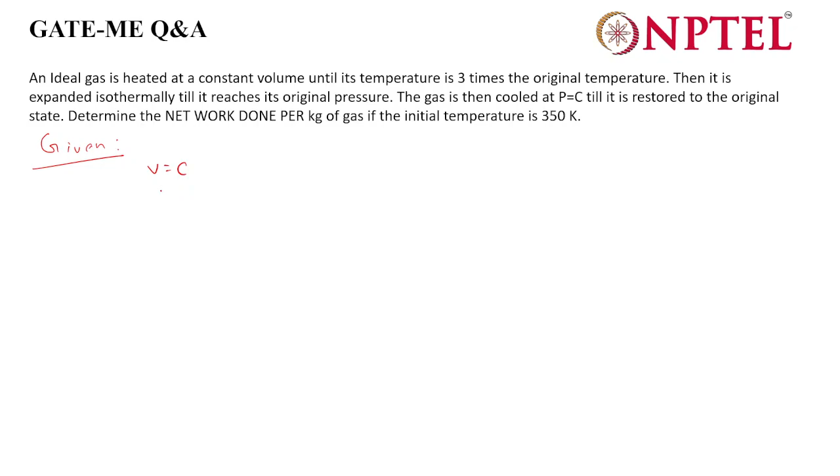So here we will write the constant process - they have mentioned an ideal gas heated at a constant volume. So volume is constant, they have told, and its temperature is 3 times of the original temperature. So when we try to make the PV diagram.

Temperature is 3 times of original temperature. So what can anyone tell - what happens when volume is constant and temperature is heated? Hello. The pressure will increase. Pressure will increase, and pressure will increase - how will it increase?

It will be directly proportional to temperature. P directly proportional to temperature for the constant volume process. Okay, constant volume process.

At a constant volume until temperature is 3 times of the original temperature - if we take this process, this is point 1 and this is point 2. So this is P1 and P2, and we know P2 is 3 times of P1 now, right?

Hello. Yes sir, yes sir, sir yes sir.

So now they told that it is expanded isothermally till it reaches the original pressure. So when it will expand, then the pressure will drop, right?

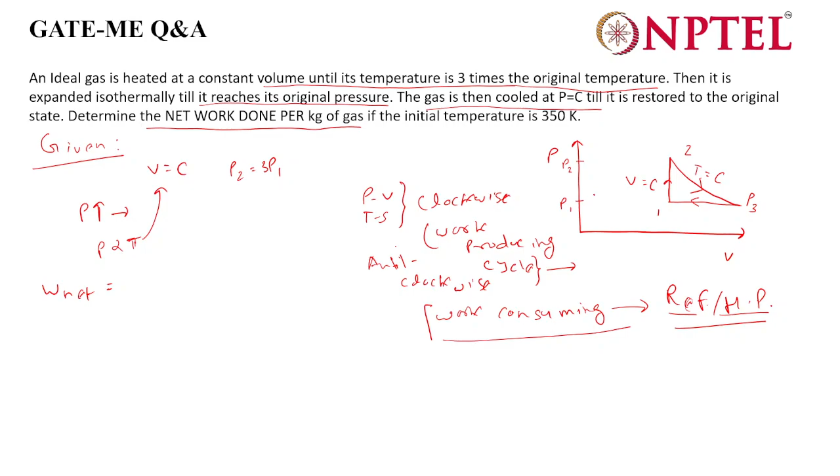So now coming to this, we have to find the net work done per kg of gas. So what would be the net work done? Work done from each process in the cycle, right? Hello. Yes, sir. So how many processes are here? Three processes are there, right?

Correct. First process is work from 1 to 2. Second process work is W 2 to 3, and 3 to 1. We will find the work from each process and add. Okay. So process 1, step by step we will go.

So for the constant volume process, what is the net work done? Zero, sir. Hello. Zero. Is anyone asking anything?

Okay. So process from 2 to 3. Which process is that? Isothermal, right? So here, what data are we having? Here they have given initial temperature is 350 K. Apart from this, they haven't given anything, right? Hello. Yes, sir. So the first point temperature is 350 K.

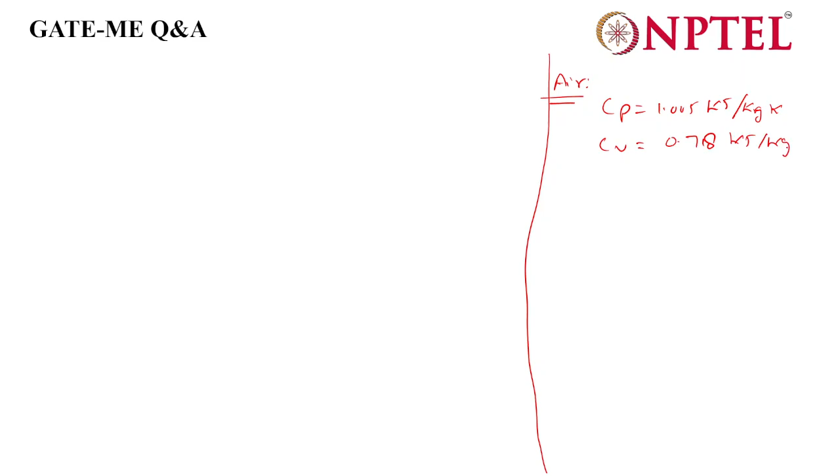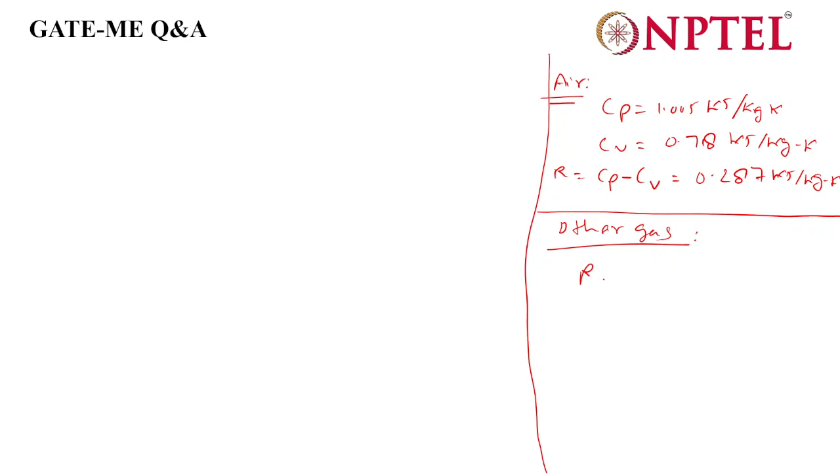For air, Cp is 1.005 kilojoule per kg Kelvin, and Cv is 0.718 kilojoule per kg Kelvin, and R is Cp minus Cv, so 0.287. And for any other gas apart from this, R would be R bar by M.

Only mic is on, sir. You can mute; if you are asking anything, then you can unmute. Okay. Sir, someone's mic is on.

From your side, try to unmute.

Okay. So if any other gases we have to find, then R is 8.314 divided by molar mass, in kilojoule per kg Kelvin. And here Cv would be R by gamma minus 1. R we will be finding from here, and gamma for that gas you would be knowing. So Cv you will find from here, and Cp would be gamma R by gamma minus 1. So these formulas you have to keep in mind. Actually I have derived all these, but for the initial part you were not there.

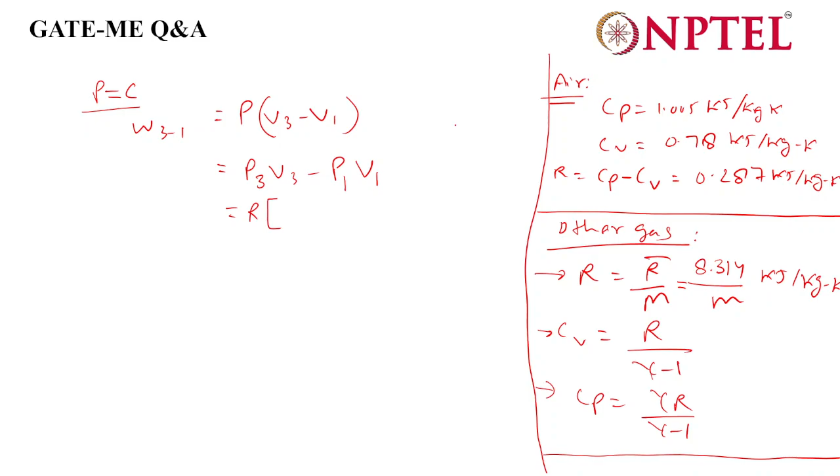That is the constant pressure process. So for the constant pressure process, what is the work done formula? Pressure into V3 minus V1, right? So here P3 V3 minus P1 V1, but we don't know the value of pressure and volume. So from the ideal gas equation we can write it as R T3, and P3 and P1 are the same, right? Yes, sir. So R into T3 minus T1.

Do we know the value of T3 and T1? What is T3? Yes, sir, we know, 1050. Here T3 is 1050 and T1 is 350. I think here we are going from 3 to 1, na? So the opposite of that would happen, na? 3 to 1 we are going, right? Getting what I am saying? Yes, sir.

So actually the process is like this. Here we are going from 3 to 1. So final minus initial we have to write. The final point is 1 and initial is 3. Here P1 V1 minus P3 V3. So according to the ideal gas equation, we will write it as R into T1 minus T3. So R would be 0.287. T1 is how much? 350. And this one is 1050. So what is this value?

Hello. Have anyone calculated this value? Doing, sir. Minus 200. Sir, minus 200.9 kilojoules per kg. So for all three processes now we have done the work. So net work done would be how much? 331.06 minus 200.9. So net work done, how much? 130.16 kilojoule. So here this is the simple question for the net work done.

So now moving to the next question. If anyone has not done it, you can see. Should I wait or try the next question? Take some time. Sir, it's completed. Please proceed to the next one. Okay, I'm waiting for 1 minute. Sir, show the previous slide. No, sir, next question, please. Don't worry. Share the PPT of the previous class, sir.

Sir, please explain how we have taken V3 by V2 in process 2 to 3, the work done in process 2 to 3. One minute. Please explain the formula again. You are saying, in process 2 to 3, how we have taken P2 V2 ln V3 by V2, right? Yes, sir. Sir, one more time explain from the start.

Yes. So here I am explaining again from the start. Three processes are there. They have given the initial temperature for point 1. Process 1 is from point 1, a constant volume process, and the temperature is increased. If volume is constant, then pressure keeps rising, directly proportional to temperature. So from 1 to 2 the temperature rises from 350 to 1050, right?

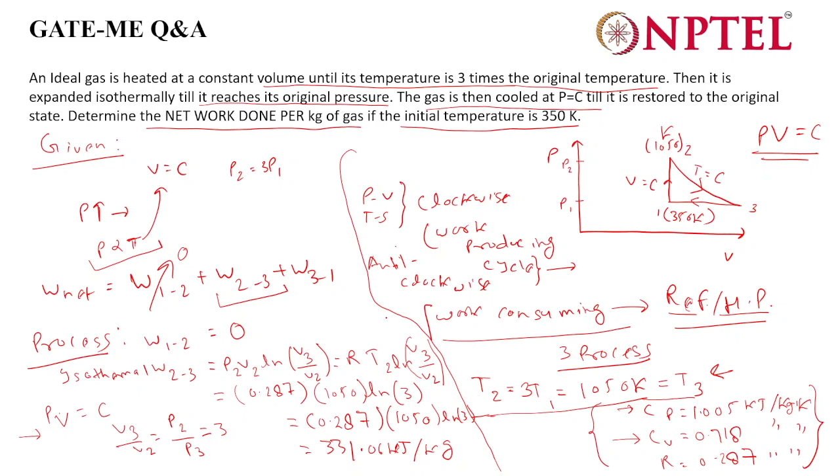Next one is the constant temperature process, the isothermal process. So for the isothermal...

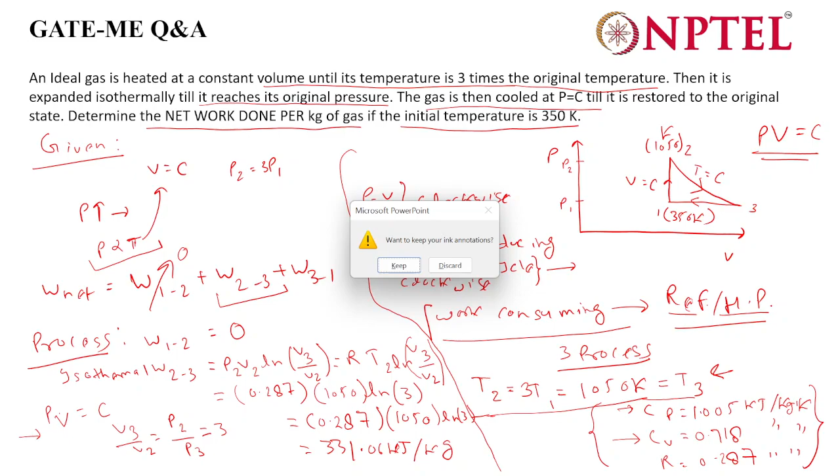Sir, I have one doubt in the previous question. Sir, according to the second law, we cannot do net work without rejecting heat. So in this cycle there is no rejection.

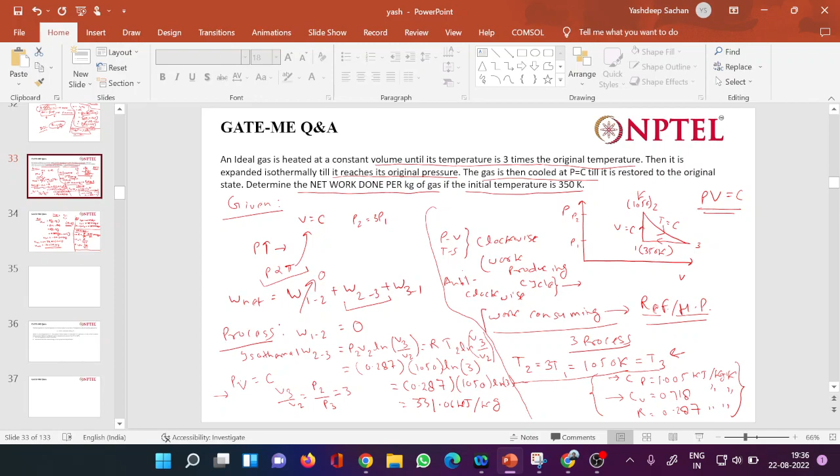Not calculation, is this cycle possible? Don't worry. The cycle is there, so it is possible. You are saying heat transfer is not there. Heat transfer is there, but you haven't calculated it. That is what I said. Okay, sir. So read this question.

I am also reading along with you, so it will not take much time. The heat capacity at constant pressure of a certain system is a function of temperature. So for the ideal gas, what are we considering?

Cp is a constant we are taking, right? With the temperature we are saying it will not change, but generally it will change with the temperature. We used to take it as a function of temperature, and in the thermodynamic property relations we will see that Cp and Cv will be changing with the pressure also. So for the ideal gas it will be a function of temperature only.

So that's what they have said here: at constant pressure, Cp is a function of temperature only and may be expressed as this expression they have given. So it is the specific heat capacity or the heat capacity. Can anyone tell what is the difference between the specific heat capacity and heat capacity? Sir, specific heat capacity is per unit kg.

So is it specific heat capacity or heat capacity? Heat capacity, sir, written initially in the question. So don't worry about the mass; there is no mention of mass. It includes mass. So when temperature is in degree Celsius, we have to take it.

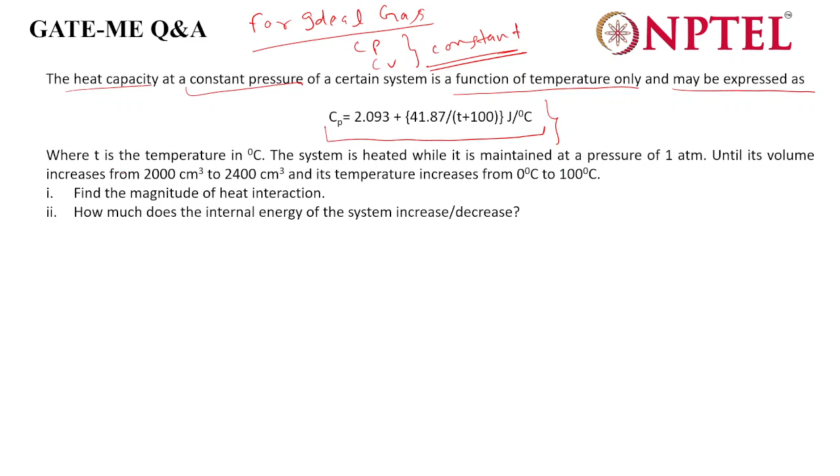So the system is heated while it is maintained at a pressure of 1 atm. So pressure is constant here, and the value they have given is 1 atm, right? Until its volume increased from 2000 centimeter cube to 2400 centimeter cube. So V1 they have given 2000 and V2 they have given 2400, and the temperature has increased from 0 degree Celsius to 100 degree Celsius.

So what we have to calculate in the first question? Sir, you have to calculate the heat interaction. What is the heat? Can anyone tell? Cp dT.

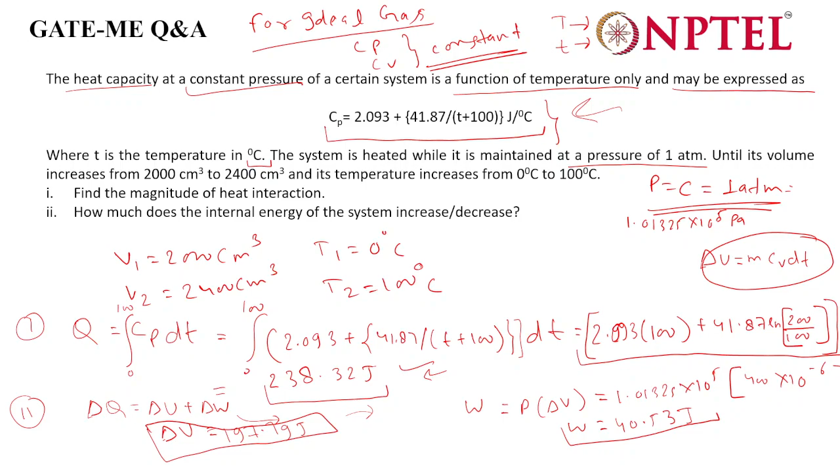Okay okay sir, tell me about the whole problem. Okay, read this question first. Here in this question you try to go from basics and then it will easily be solved. Just read it once.

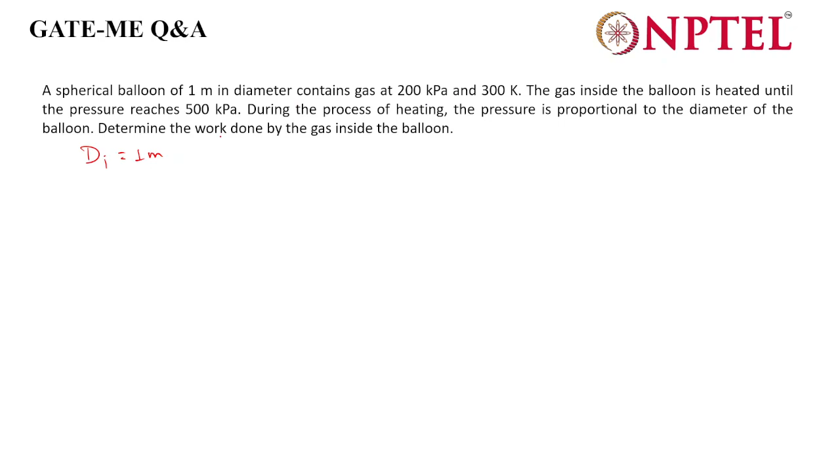Okay, a spherical balloon of 1 meter diameter containing gas at one. So it has given the initial diameter at 1 meter, and diameter containing gas at 200 kilopascal. So pressure, initial pressure they have given like 200 kilopascal, and the temperature is 300.

The gas inside the balloon is heated until the pressure reaches 500. So the final pressure they have given at 500. During the process of heating, the pressure is proportional to the diameter of the balloon. So what they said here is pressure inside the balloon is directly proportional to the diameter.

Determine the work done by the gas inside the balloon. So we have to find the work done. So here which formula are you going to use? P1 V1 by T1 equals to, we find volume sir, by that. Temperature is constant. Where is it saying sir, temperature is constant?

Because it's a balloon sir, hmm, we use atmospheric air to fill it sir. So how will you know if temperature is going to rise or decrease? If nothing is mentioned, if temperature is not written in the question, it doesn't seem like, na, it will be constant.

Sir, volume is proportional to d cube. So we can make a relation between P and V to make a process equation using this. Sir, will it be a polytropic process? Tell, proportional to what? Yes sir, so it will be P proportional to V power 1 by 3. So you are trying to convert PV to the power n equal to constant, right? Yes. So from here you will take the value of n, then calculate the work done.

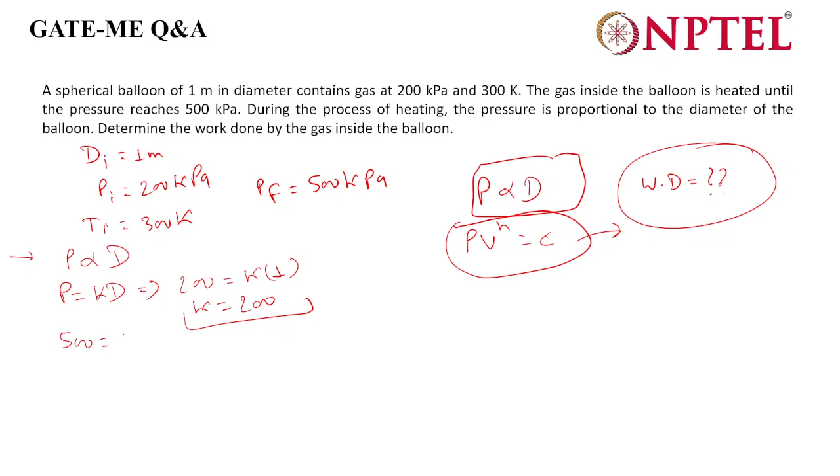Hello, yes sir. Final pressure they have given is 500. So what will be the final diameter? 2.5 meter. 2.5 sir, 2.5. So now we will mark 2.5 meter.

So what is the work done? Work done is integral of P dV, right? Yes sir. So pressure, we know pressure is 200 into D. Sir, relation of PV, by Boyle's law?

P1 by P2 equal to V2 by V1, thus we get, which volume sir follows Boyle's law? What is Boyle's law? Pressure is inversely proportional to volume. So we get a relation P1 by P2 equal to V2 by V1. Can we use this relation anywhere? It is valid only for the isothermal process, right? Temperature is constant, where is it written here that temperature is constant?

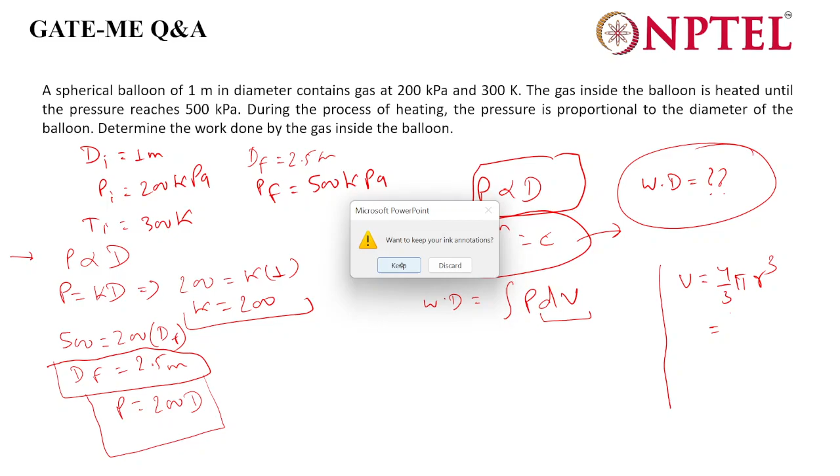Okay, okay. So here we know pressure in terms of diameter, right? We know pressure, and the initial and final diameters we know, and if we know dV, change in volume, in terms of diameter, for the sphere we can easily find it. Volume equals 4 by 3 pi r cube. When we convert r to diameter, how much will it become? Pi by 6. It will become pi by 6 d cube, right?

So dV would be... into D square dD. Any doubt till here? So how can you write P equals 200D? Hmm? P equals 200D, how can you write? Here we have calculated the value of k, na?

K is 200. 200 unit also we include, kilopascal per meter, okay fine. So when we write k is 200, because we found this 200 from the given initial diameter and the mentioned relation. This is directly proportional to diameter, K. So from here we will calculate K, and with the final diameter using this relation we will find the final value.

So dV we know in terms of diameter. So what will be the work done here? Pressure is 200 into D, and what is dV? But sir, here pressure and volume both are changing, right? So you write work done equals integration of P dV, but here pressure is not a function of volume, pressure is a function of diameter. So volume also I converted to a function of diameter here.

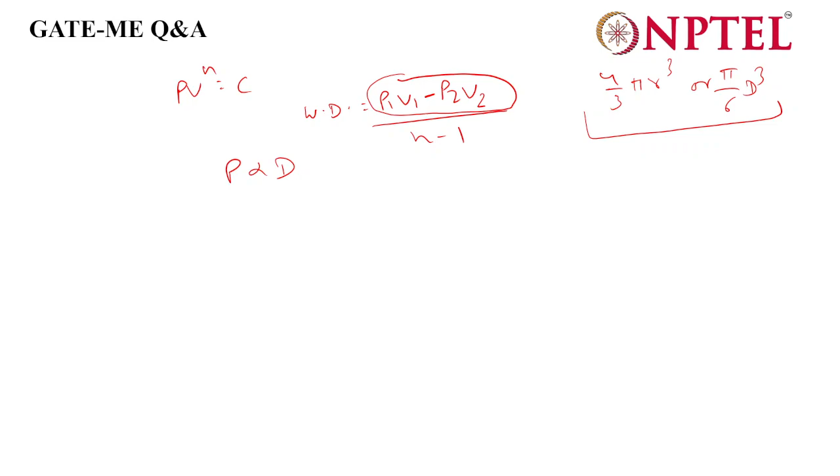And I am telling - okay, so here the pressure is directly proportional to the diameter. The voice not audible, sir? Hello, audible or not? Sir, it's audible. Yeah, it's audible, sir. So P would be - k here will be the constant, right? And the diameter d.

So here, what is the volume? Pi by 6 d cube, right? So what would be the value of d from here? 6V by pi, and cube root of that. Getting it or not? Yes sir. So when you take that, 6 by pi is also constant, right? So 6 by pi to the power 1 by 3, and k - here, v to the power 1 by 3, this will be put, and this is again a new constant, right?

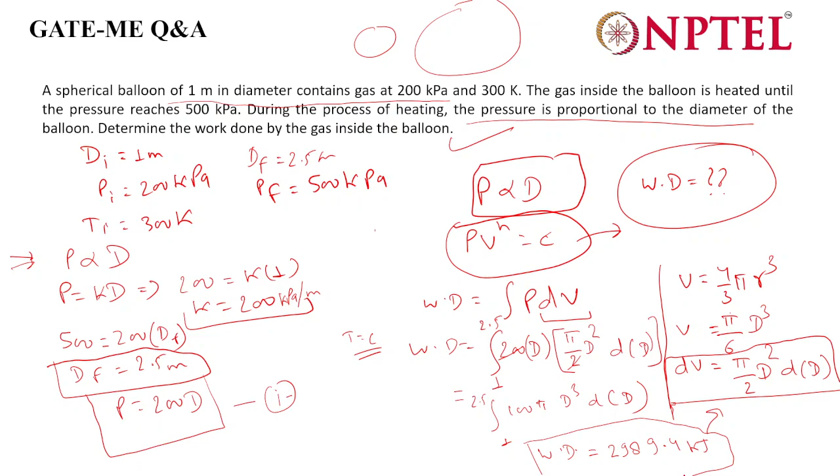Not getting what you are saying actually? Sir, how did the value come? What are you saying? I didn't get how the value dV came, sir. Could you please explain?

This formula you know. So if you differentiate this volume on both sides, what will it become? dV is equal to pi by 6, a constant, and D cube is there, so what would be the derivative of this? D square into dD, right? So this is only written there. Yeah, okay, sir. Thank you.

Okay, so we will go to the next question. I would say you have to go from basics only, nothing more than that. Here we have used only work done p dV, nothing else. So in this question I will give you a hint, then we will start the second law, and two more questions I will give you to try. I think that would be better. I will give hints only for two questions; take screenshots of those questions.

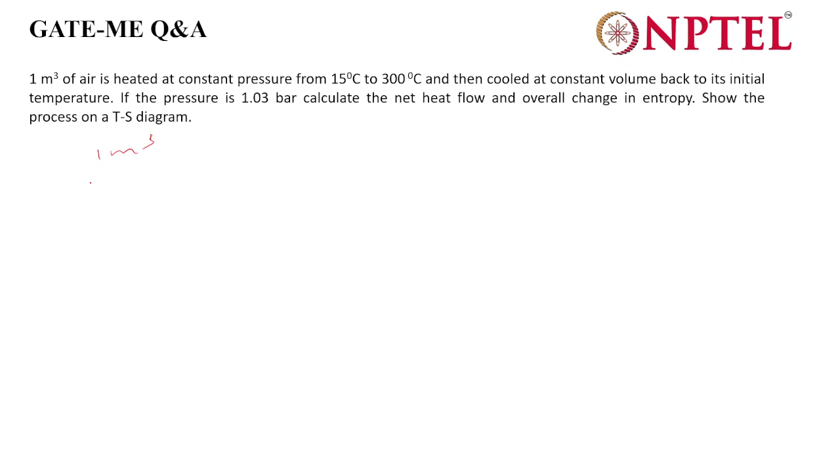So what is he saying in this question? 1 meter cube of air is heated at constant pressure from 15 degree to 300 degree Celsius. So volume is 1 meter cube, T1 is 15 degree Celsius and T2 is 300 degree Celsius. First they have heated at constant pressure, keep that in mind, and then cooled at constant volume back to its initial temperature. Keep in mind, initial temperature, not pressure here.

The pressure is 1.03 bar. Calculate the net heat flow and overall change in entropy. So net heat flow and change in entropy you have to calculate. Two processes are there. We will go to the TS diagram. So does anyone know how to draw the processes in a TS diagram?

Explain, sir, the TS diagram. Okay, now I am starting. Then later I will ask. So what is it? Constant pressure from 15 to 300, like heating, then entropy will increase. Like this is the process from 1 to 2, let's suppose. So this is the constant pressure process. Okay.

Hello. Yes, sir. Then cool at constant volume back to its initial temperature. So its initial temperature is this. So now I am here and now want to come back at point 1. So how do we have to reach there? It is constant pressure and the next one is the constant volume process. One minute, I will draw it here.

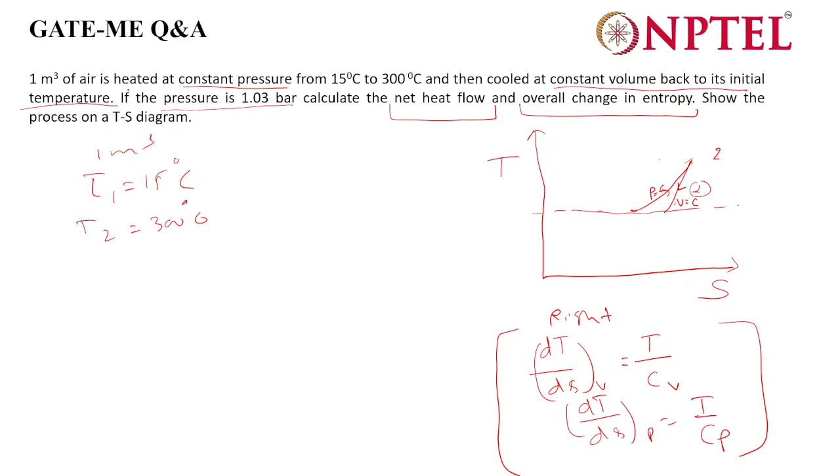So first a constant pressure process is there, and next the constant volume. So for both processes what would be the work and heat transfer? Per unit mass you have to calculate or what? So first you calculate the mass, how much air is there. Use PV equals mRT. From the pressure, volume, temperature you will get mass. Mass will be conserved every time.

Then after getting mass, you can easily calculate QP and QV using mCp delta T and mCv delta T. QV is mCv delta T. Getting or not? Yes, sir. So you will use this way, and the entropy formula I have already told you. Do you remember? Yes, sir. Let's number the processes 1 to 2, 2 to 3. Again I will give the formula to you, then you try.

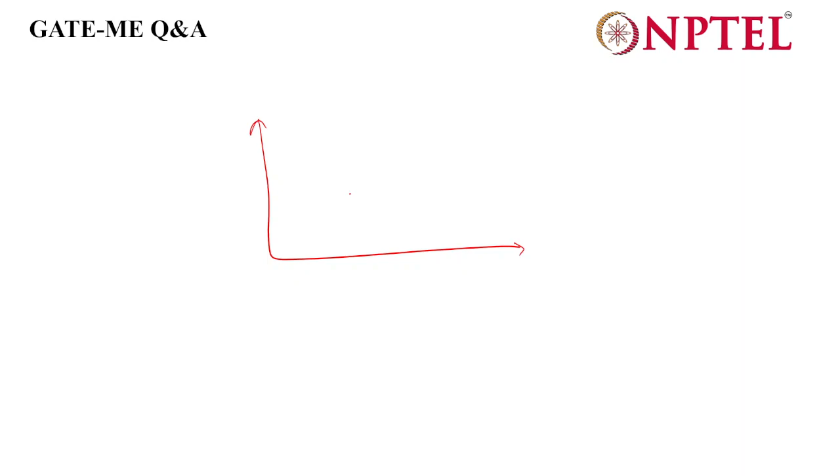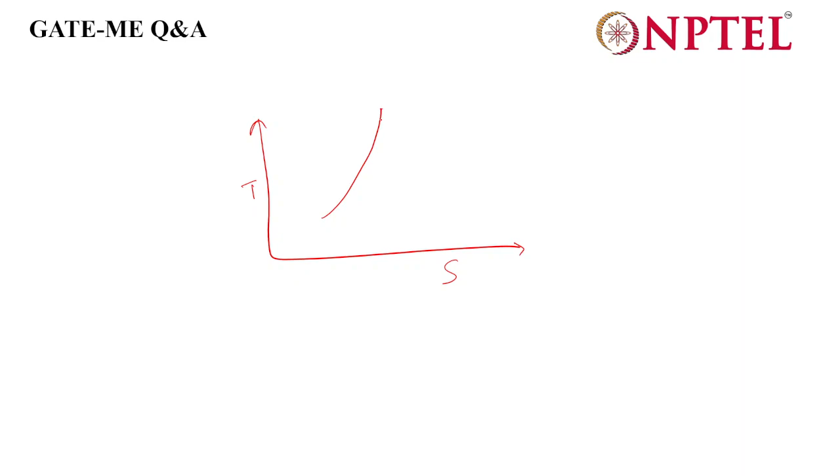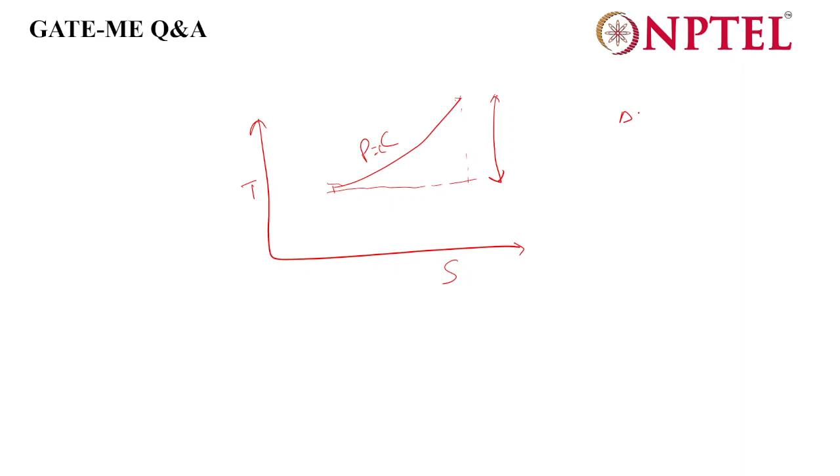Sorry. It is clear, na, the slope for the constant volume process would be more. Hello. Yes, sir. So let's suppose this is the constant pressure process. So what is the change in the temperature value? This much, and you have to return back to this point only again, but its slope should be more. So what is the slope? Temperature change divided by entropy change here, right?

So if the delta T is the same and you have to increase this, what would be less? This should be less. How should this be less? The initial difference is this, so the final one should be less than this, anywhere in between. I'm not saying exactly here, but anywhere in between, like here it will stop. Why is it here? Because you have to increase the slope of the constant volume process. So that base should be less. So delta S would be less for the constant volume process.

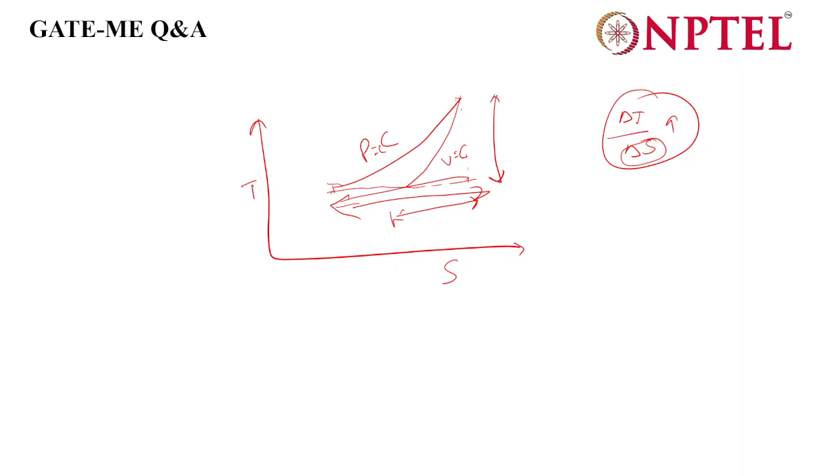Hello. Yes, sir. Okay. So try to take a screenshot of this and try solving. The exact value you will get there. Sir, one thing, please repeat it again. Which one would be less? The Cv value would be less than the value of Cp. If you are not knowing, then try to know why. Okay, sir.

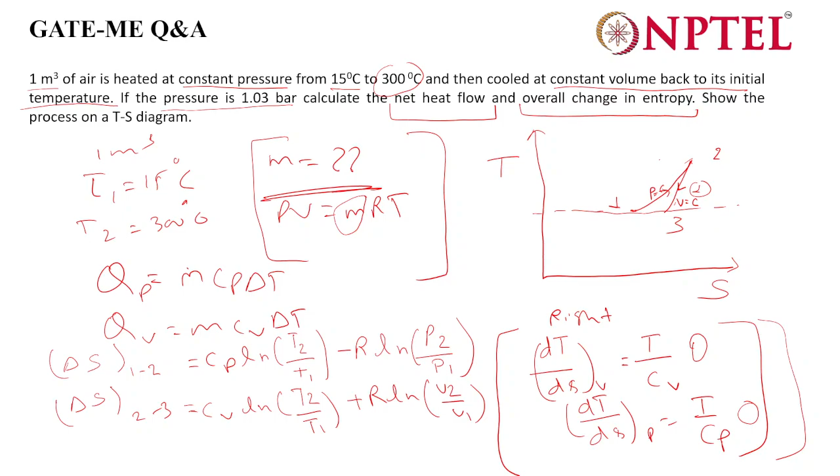Sir, why do we want to increase the slope of the constant volume process? See here, the temperature is the same for both processes. Cp would be more, so its slope dT by dS would be less. See these two equations now. If Cv is less, then its slope would be more. From this equation you will know. How this equation comes is not that important for you, but if you want, you can easily get it from dH is equal to Cp dT.

Hello. Yes, sir. You are audible. Hello. I am audible now. Yes, sir. Audible, sir.

So one equation you would have studied: what is H? H is equal to U plus PV. So from here, what would be the dH? dU plus PdV plus VdP. So this would become dq, and for the reversible it will become TdS, right? So when you take the constant pressure process, VdP will become 0, right?

Yes, sir. Got it. Now what would be the dH? For the constant pressure process, it will become Cp dT, right? So from here, what will be the relation? dT by dS at constant pressure will become T by Cp. Actually, you need not go that deep, but you may not forget by going this way. But you have to remember these things.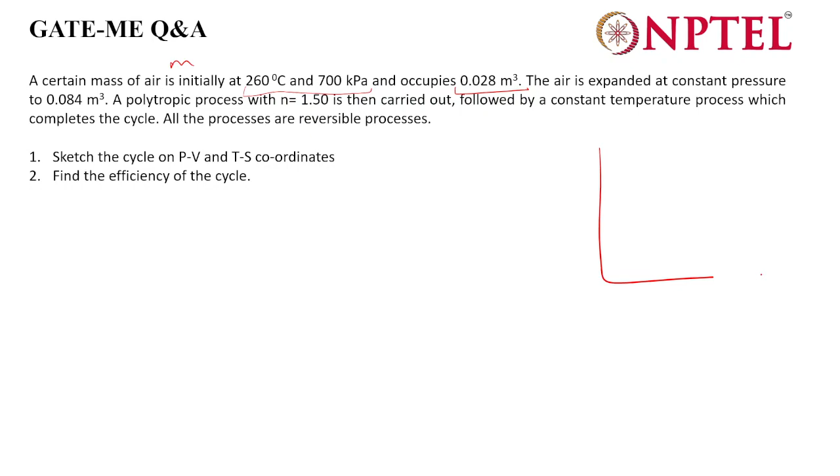And the air is expanded at constant pressure. So initially it is the constant pressure process. Expanded means volume will be increasing to 0.084. First volume and final volume they have mentioned. A polytropic process with n equal to 1.5 is then carried out, followed by a constant temperature process which completes the cycle. Okay.

Hello. Yes, sir. Sir, you are not audible. Hello. Audible or not audible? No, sir. We have to increase. Okay, we will make it audible.

So first we will go this way. So from there, which way can we go? Down, sir. Down, right? This you have to think, otherwise the question will not be solved. Like this it will go. Why will it not go upside this way? Sir, pressure is constant and air is expanding. Then the volume increases from here to here, no? Pressure should decrease, like this way. You have to think whether it will go up or not.

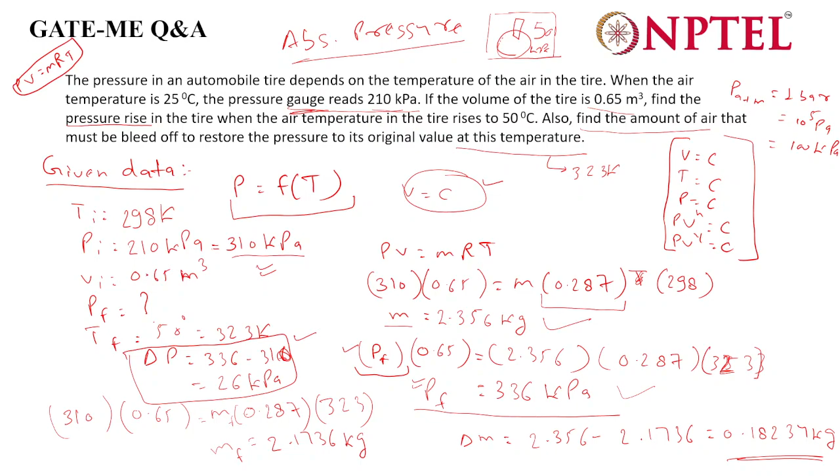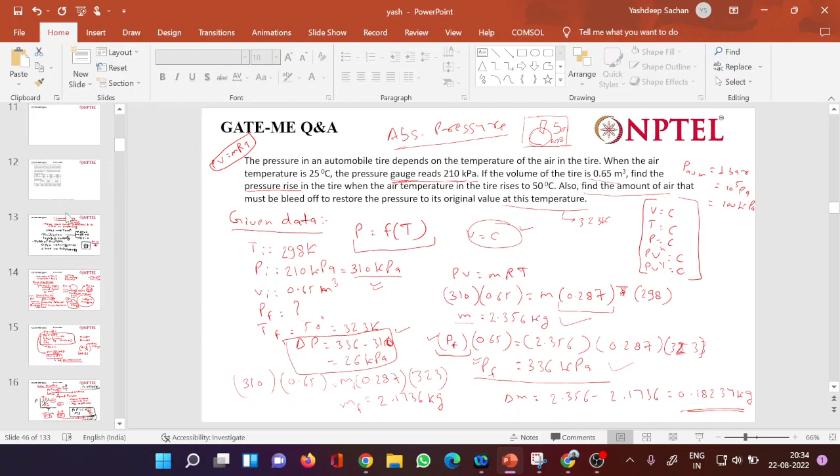No, I'm not seeing anything. Sir, could you please share with us the previous slide? We have not attended the previous lecture. Actually, with slides you may not get the things, because I used to write only at that time. So I will share. I have not written anything directly point to point. So if some points you are not getting, then you have to tell me. Like here, I have written this way.

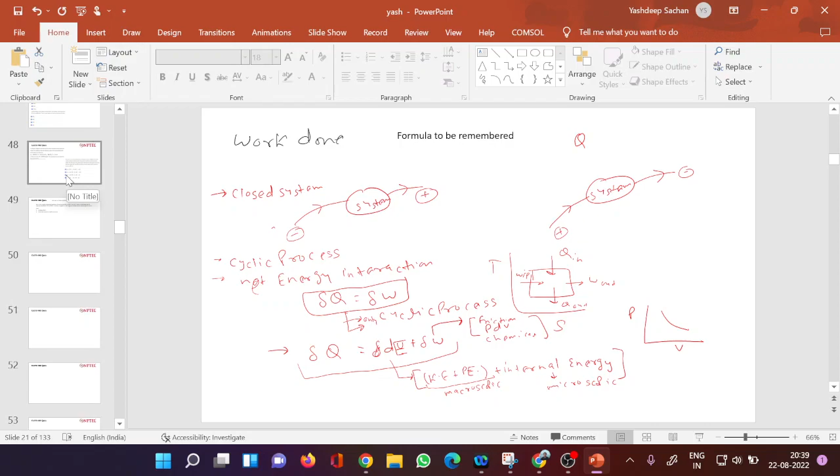Good questions from there we will take. After this I will take 20-30 questions from GATE previous year, and I will put them in the slide that I want to share with you. Yes, I will share this PPT also, and I will put it in that slide only.

There I will tell you. Sir, any books for preparation? Previous year book, are you having or not? No, only the question paper is available, sir.

So you can order any coaching book online. It's okay, sir, for coaching book. Yeah, for previous year it's the same. Sir, are the coaching books for theory good or not, sir? Actually, for theory the books...

From the GATE point of view, I would not say it is very good, because if you are going for conventional type questions and everything, then it's fine. But for the coaching, they used to give one workbook, na? Yes sir, I have the workbook and the previous year papers.

So with that workbook, are the lectures from NPTEL better, sir? NPTEL is also better, but actually I am saying if you haven't gone through that part once, then you go for NPTEL completely, because NPTEL covers the basic fundamentals. And for GATE, it is supposed that you have already done that part, so you have to go through more questions and all.

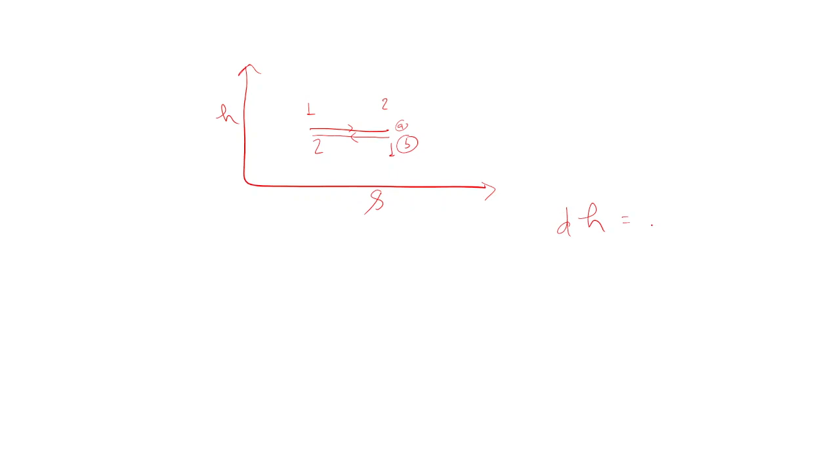equal to tds plus vdp. Okay, yes sir. So here dh would be 0. Yes sir. So TDS is not 0.

And here what happens in throttling, minus vdp would be there, okay. And in throttling, pressure drops or increases? Sir, that is the same thing I am asking.

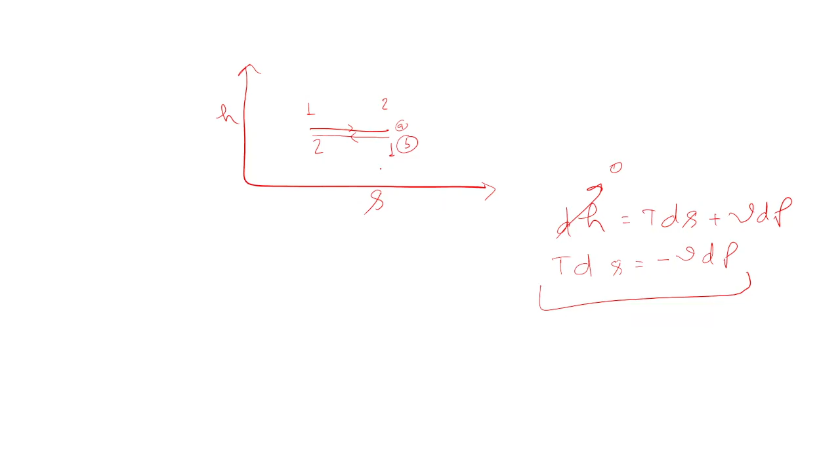throttling as an irreversible process, okay. Irreversible, where you consider that temperature would never be 0 and ds would be positive, right?